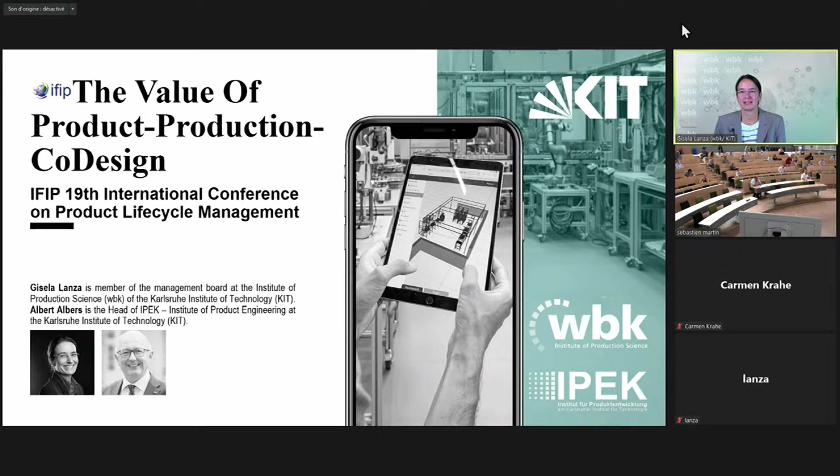And as you heard already, I'm a purely production guy, and I do that research together with our Albert Albers here in Karlsruhe, who is the chair of product development.

So when we talk about engineering, in Europe we have more than 17 million engineers. That sounds quite good, but when we look into the country Germany, and we are really an engineer country, then we have to say we are in a declining area. So we have fewer engineers year by year, especially in mechanical engineering, we have really a dropout. And that's crazy because we need these guys and we need this engineering.

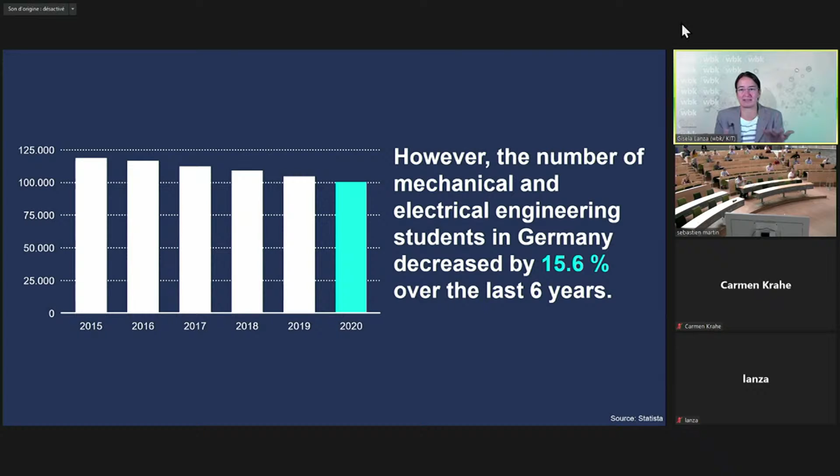And when we look at what engineers do, we have to say only 1 of 6 are working in our field, in our field of, let's say, product and production engineering. Why is that so? I think the world is changing.

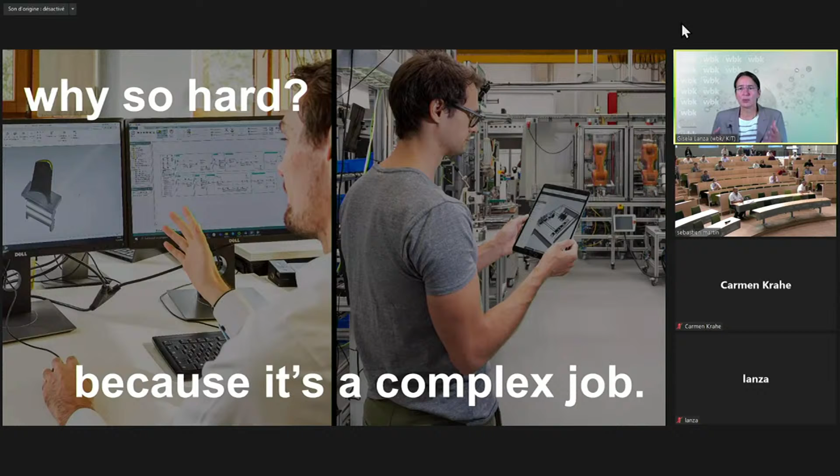Why? It's hard. I think we really have a complex job, and about this complexity you heard a lot in the last 2 days, and I will also speak about this complexity, but I think we have nowadays good tools to handle this complexity. Even 10 years ago already, we had a survey here in Germany, and we thought about what has to be done until 2020. And I mean, if you see that, we are still not finished.

Still, we have to improve the effectiveness of product engineering processes. Still, we have to manage this complexity, and the uncertainty is really high. I think we have good methods and tools, but still they are not standardized. And I think the greatest potential is really that we integrate product development and production planning.

And there I would like to stress this, let's say, not only a new buzzword, but a really important topic where you are all involved, which is product production co-design. What do we understand here? We really think that we need a highly collaborative and parallelized planning, development, and realization of the products and associated production system. We know that already, but we have to think not only about the operation of that, but also the business model, and we have to think about systematic circular use of our products and production systems.

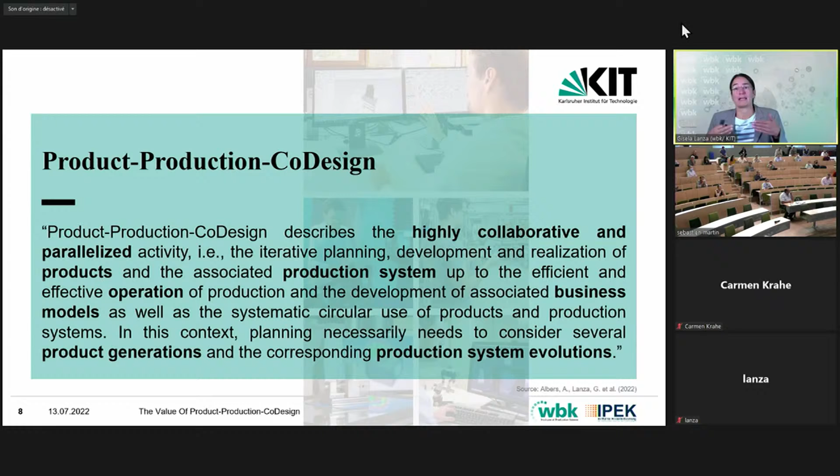And so thinking about not only one life cycle, we have the strong belief that we can model our products and production systems with the idea that products are developed always, or often, in generations. I would like to explain that with the model of Albert Albers. He always explains that a product, or many products, are developed from generation N to generation N+1.

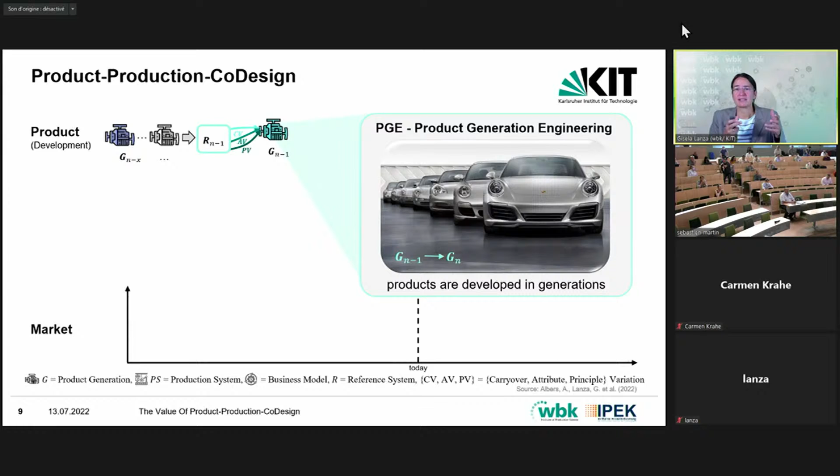So an engine, for example, has parts of the old engine. Even if we talk about nowadays batteries or new technology, it's often a part of an older generation. A good example is our German car industry. You see here Porsches, and they look similar. Even the design is similar, but a lot of the parts have the same function while getting better over generations.

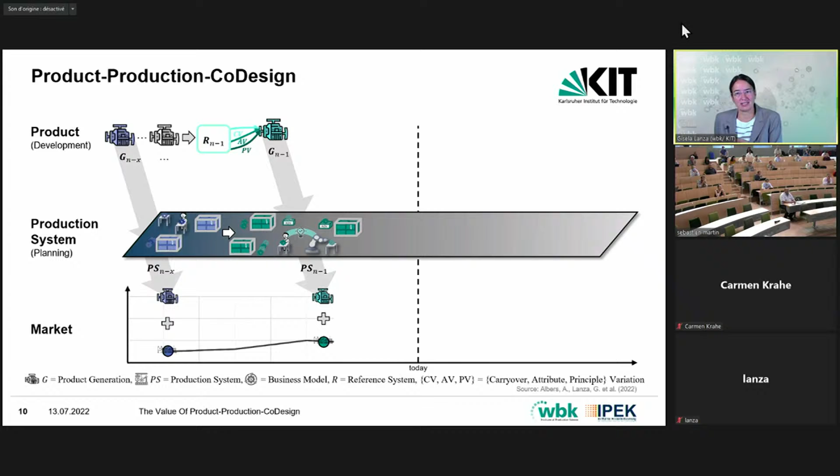And when we look now into the production system, we know we have to plan according to the product features, the associated production system. In many cases, we plan the production system in an evolving way so we don't have to put everything out and do a totally greenfield production plan if a new product is coming. Car industry or OEMs are somehow different, but a lot of suppliers, machine tool industry, they use their existing production system and evolve it, changing it according to the new product requirements.

And therefore, when we talk about a lot of new products, new features, short life cycles, we really need agile production systems, or we call it changeable production system, with all change drivers and change enablers. Like you see here at an example of a typical assembly line, our learning factory, where we can nicely show how to do modularity or mobility, scalable systems.

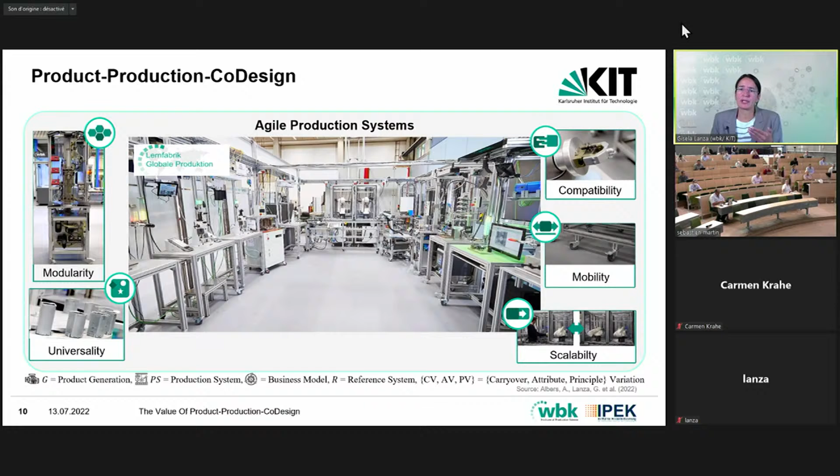So that's needed to really adapt quickly to new products. We have to think about the strong interdependencies between production capabilities and product, and we can model that nicely. But it's getting even more complex because we have to think about further generations, especially when we think about circular economy and circular production, when we want to rework, remanufacture our product, bring components in a second life into a new product. It's important that we handle this complexity and interdependency of today's production system, but also the features of the product of the future.

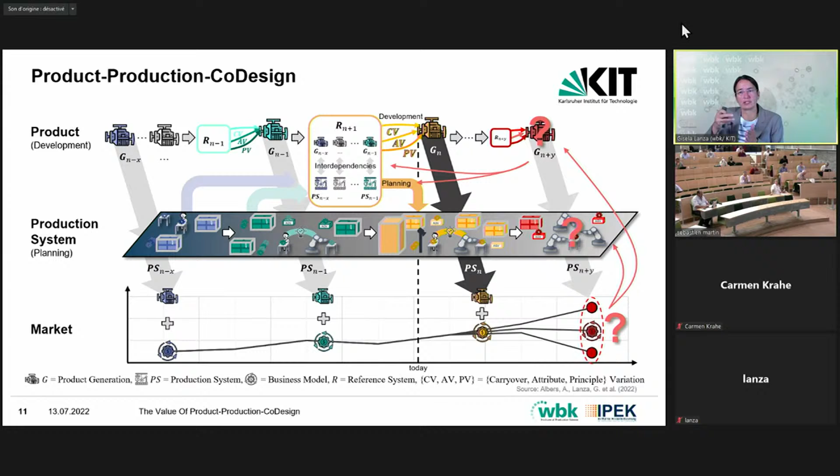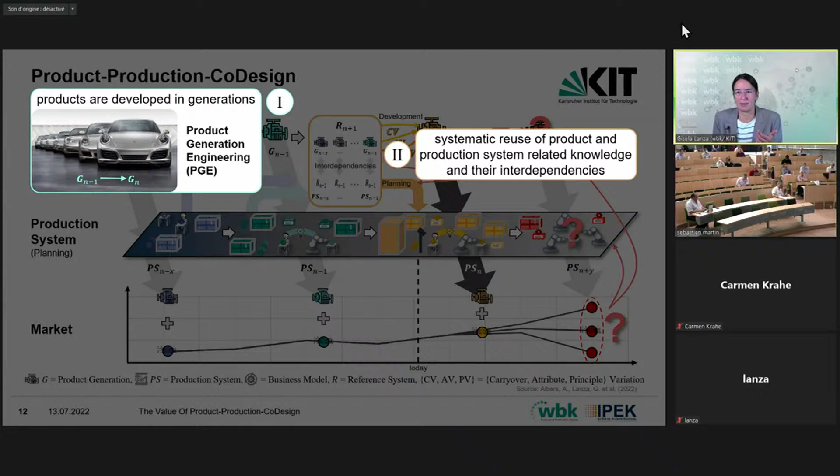And here we think it helps a lot having this model in mind, that we should think: we know a lot about products even in the future, not everything clear, we want innovation, but we can have a reference system in our product development. We can reuse a lot of knowledge from the past, and we do that in companies, but it's more or less not explicit. So it's implicit knowledge, and we have to make it explicit, put that in tools, methods, so we can easily be faster in time to market.

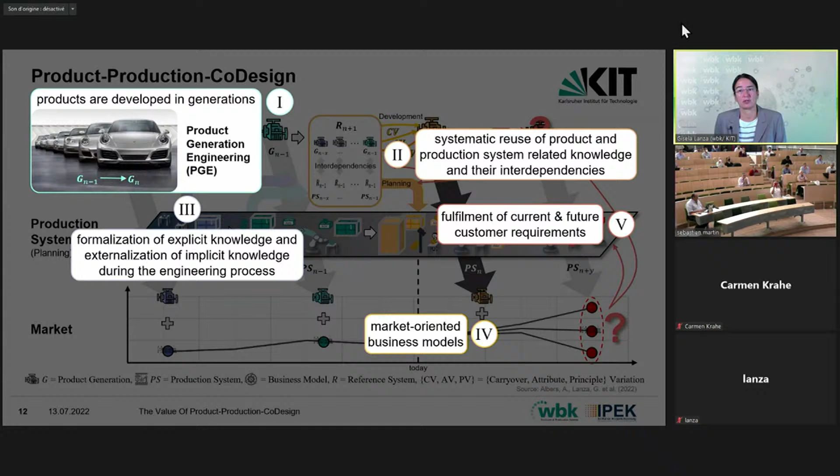And time to market is a good point. We have to be market oriented. I didn't speak a lot about business models, but sure, we have to model and design them in parallel. And therefore, I think we can then fulfill the customer requirements, not only the current ones, but also the future ones. So let's say that's the framework we are talking about.

And I would like to give short insights into what we are doing in that field, and a lot of your work is also done within that field. I think to get to a really strong product-production co-design, we need system engineering as a basic. In Germany we have a big group of people working on so-called advanced system engineering. That's also a good basis for model-based approaches, model-based system engineering. And clearly, digital twin must also be within our toolbox.

So starting with that advanced system engineering, one main issue is that Esperanto. I think we are all of one mind that the single systems in engineering, for example mechanics or electronics, are so complex. We try to have one common model and that doesn't work. But we need to have a level above that real detail complexity where people can talk to each other. That's called the Esperanto of technology, or you can call it like that. That could be advanced system engineering.

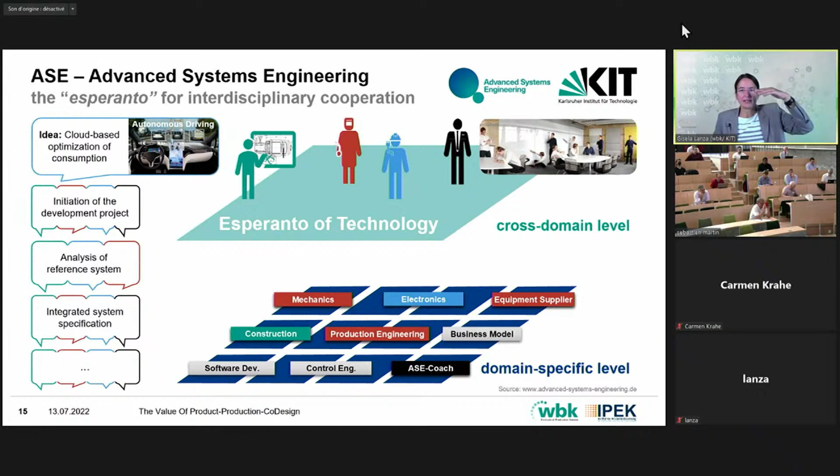For example, an electronics engineer is deeply in his E-plan modeling and designing, but then he has to share his information with others, like mechanics or construction people. So they are going up and down in development, able to talk to each other, not only personally, but in a language, in a model world, and then also be able to go back to their detailed work.

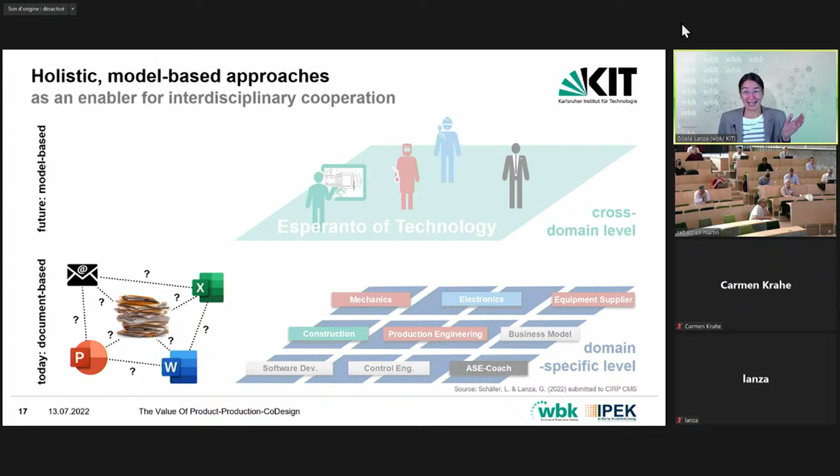And for that, I think this model-based system engineering could really be the game changer. Because at the moment everybody has his own models, his own documents, and we try to share a lot still with Excel tools. But when we come to model-based systems which understand each other, which share a common interface, that could help a lot.

Here I would like to give insight into a project, a national project called MoSyS, where we really try to do that on 3 levels: product development with product features and connection, processes, the translation between product and production - production processes - and then the assets, the resources, and that's the 3rd level, the production system.

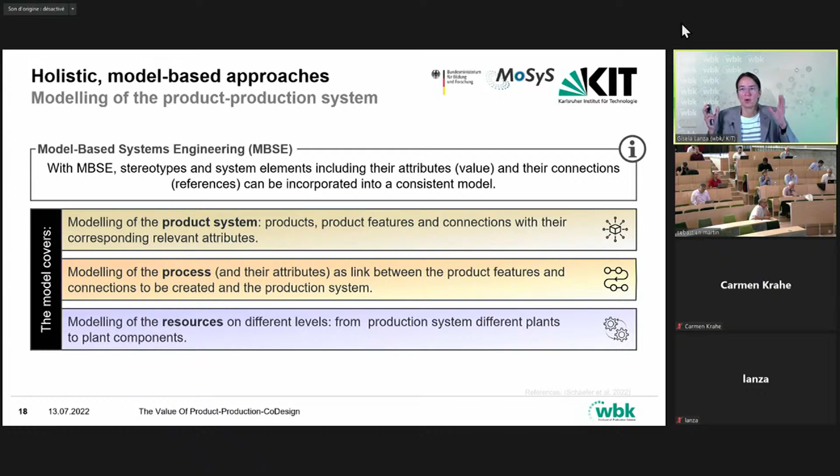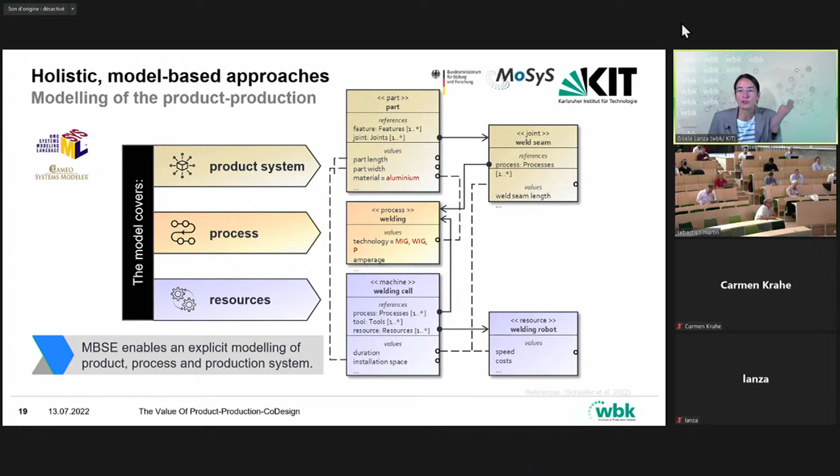So the vision is: coming up with a new product design and automatically your production system is planned. Let's say starting with a new customer variant - that's from the automotive industry, a welded part.

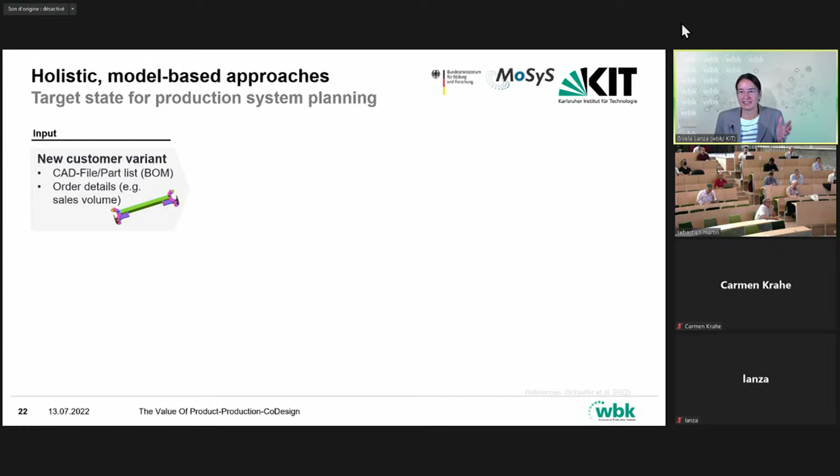You know how much of the part, or you think you know the volume, and you know the CAD file - maybe it's not finished - but then you can analyze the product, find out the similarities to past data, and that's what I mean with explicit knowledge.

You have a lot of knowledge, and you can derive process sequences, assign that to resources, and come up with a virtual production system. So that's the task - only based on product data - to come up with that workflow, and this workflow we've dreamed of for many years.

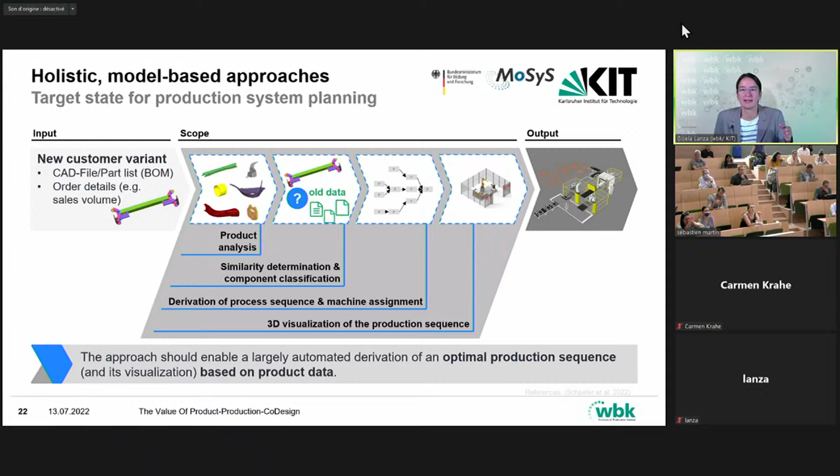What can we do for that? I think our tools nowadays are stronger than in the past because we can handle a lot of data. And that's what I want to show with the one-time expenses. Let's say you have to set up reference models with model-based system engineering, and having that, you can then easily apply it in a specific project in reality.

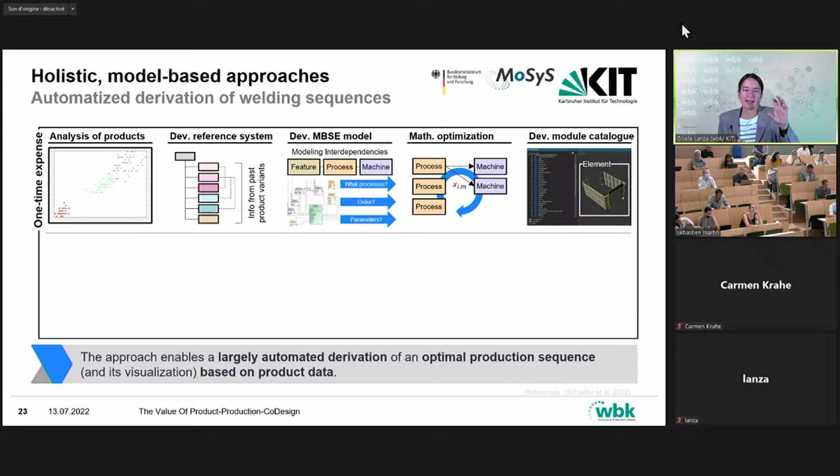For example, analysis of products - you see here some points, I will show similar examples later - where you learn about your product features, also with machine learning, and say, okay, 80% of this product I know already, I have done it in the past.

So I can classify all information about that and set up a reference system where I can classify a new product coming in. And not only for the product, but also for my processes and my resources, and then I can do mathematical optimization and come up with virtual systems, as I said before. So the tool chain in a real project, if a customer order is coming in, could look like that.

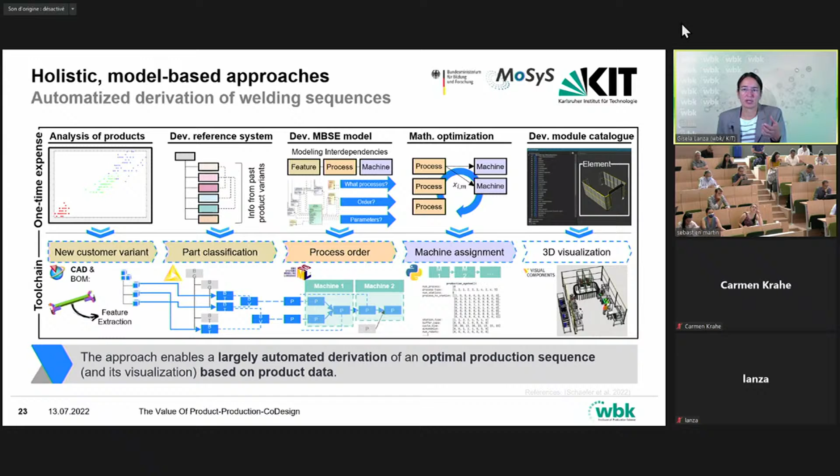You have this new customer variant, then it's classified according to the reference system. You derive a process chain, assign these machines, and come up with that visualization. And that works already - not for everybody, still a lot to do - in these model-based system models, in the reference models, but I think it's really worth setting up.

In another project, we came at it differently. Here the product function is fixed, but still as production planner, we try to optimize the process chain. Can we even persuade the product designer to change a little bit their deviation, their shape, to have better processes, better production, and therefore cheaper costs? You know, we production guys always have to optimize cost in production.

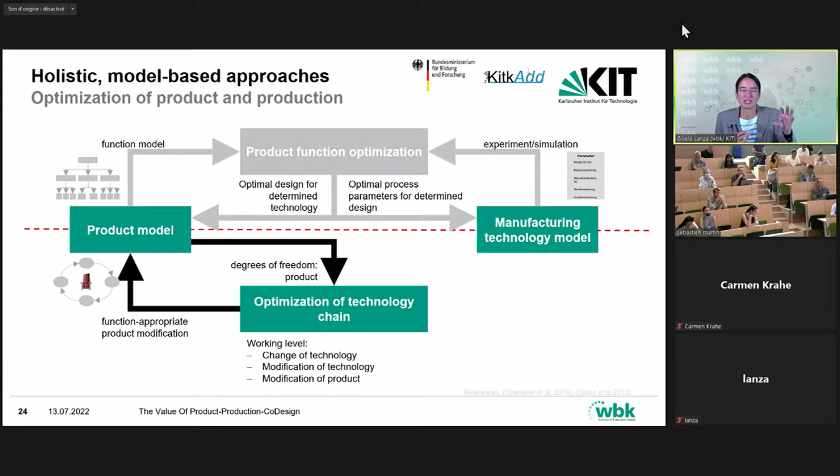So we start with a fixed product model and fixed manufacturing technology model, the chain, and try to find out what is the degree of freedom in changing the product. But this product has to have the same function as before, because the design phase is already closed. But maybe we can change a radius according to better technology. Could we change the technology and have something better, faster, cheaper, and so on?

So can we change technology, modify the technology, and even look in the future and say, okay, we did a lot with generative additive technology. We know at the moment the capability of this new technology, but we also know that in a few years we have a huge learning phase, a learning curve, so we know in 3-5 years we have higher capability than today.

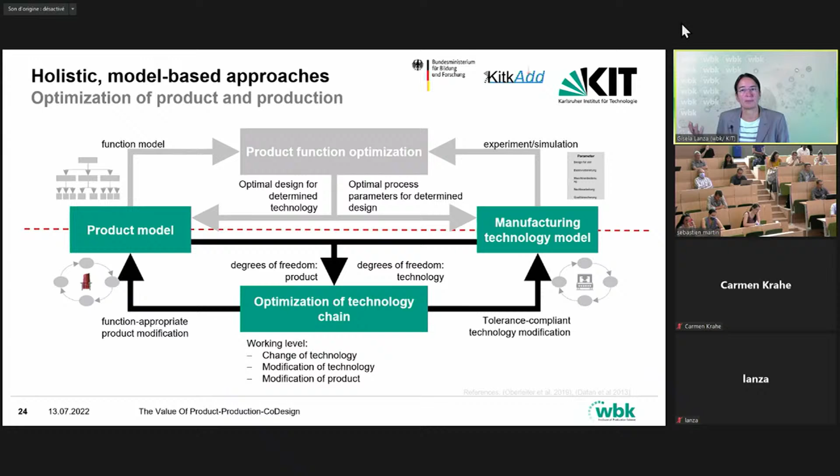I would like to give an example here: a turbine blade from Siemens within that KitkAdd project. At the moment, this shaft, the top of the shaft, is done by SLM, selective laser melting, because of cooling issues in the shaft, but the foot is still cast. In the current phase, in many cases it's totally cast, but yes, the first ones are also done partly by additive manufacturing already.

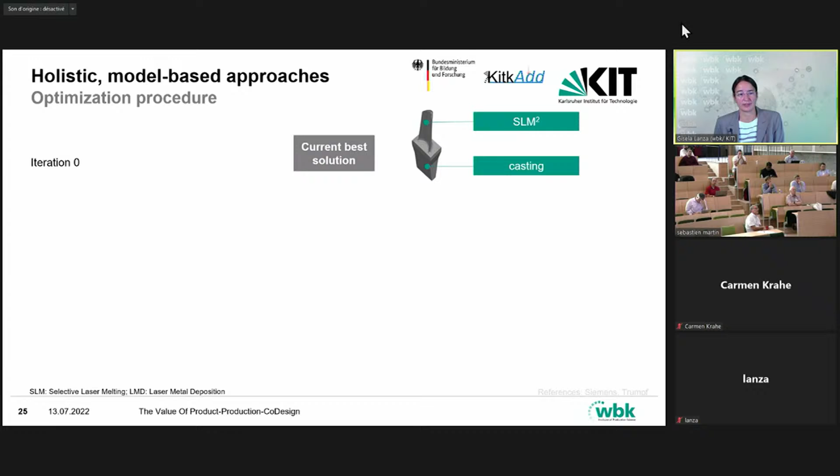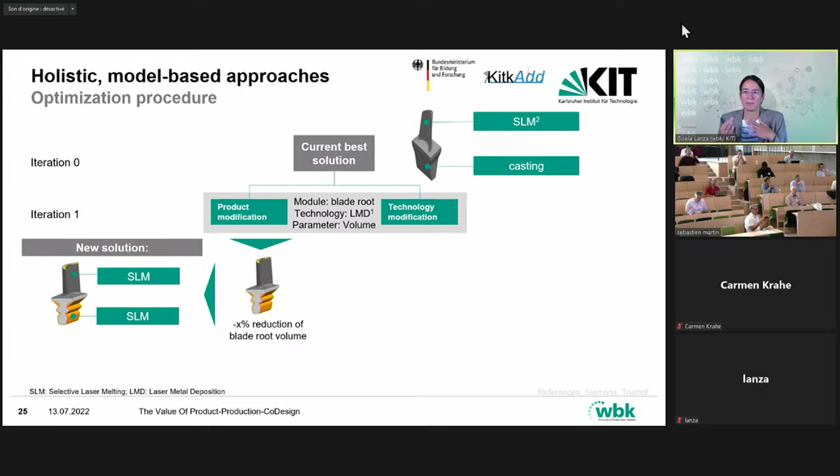Then we try to do optimization, try to find out, can we change, can we have some modification in the product? Could we think about new technology? For example, could we do everything, even the foot, with SLM? Could we then reduce the volume, and how much should we reduce the volume so we come up with the same characteristics of the product? Because the material characteristic is different here. Is that possible? Is it not possible?

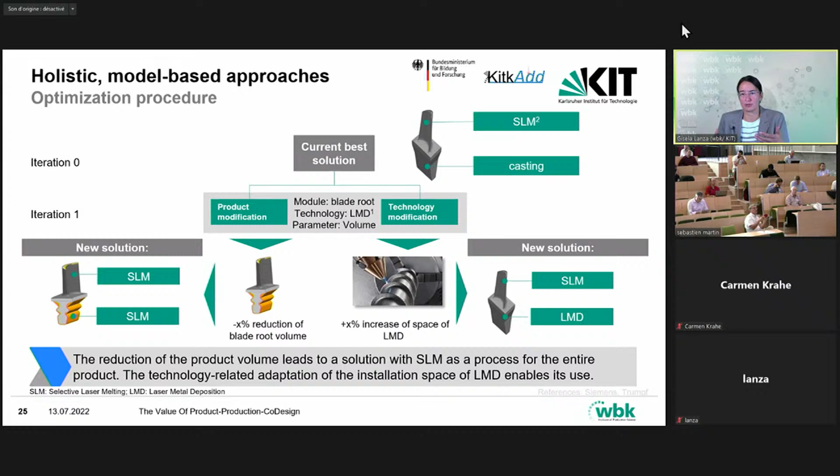On the other hand, we have new technology like laser metal deposition, which works with bigger volume, so we can come up with a faster process. So we could do the foot with LMD.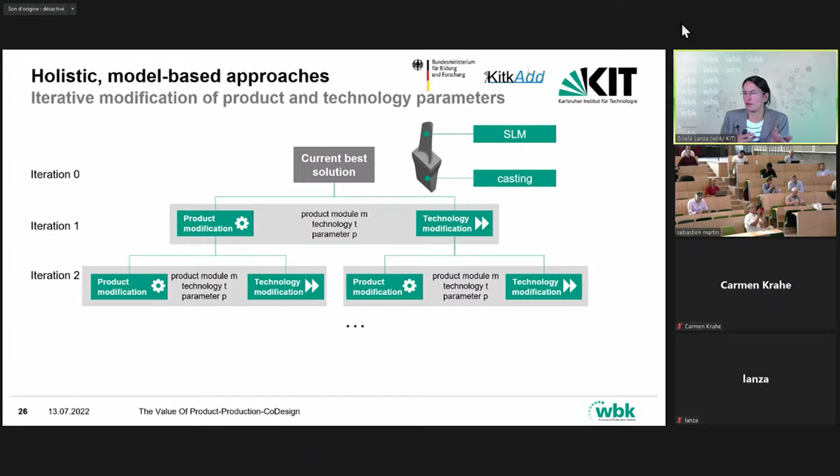So we do that iteration and come up with modifications in terms of cost, in terms of material characteristics, but then in the end, clearly the designer and the responsible product manager have to decide if that is possible, because it's only one part of a bigger product. So we do that iteration, coming up with an optimized solution.

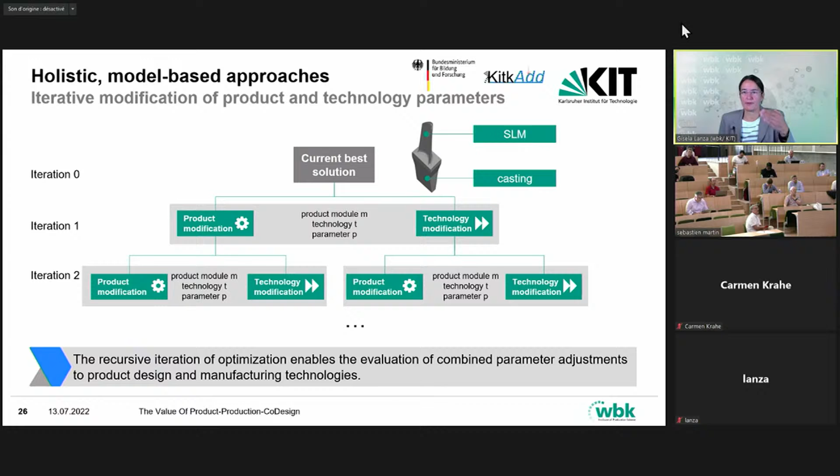For example, here the solution could be a conventional part. We can compare that with the starting part we saw, this hybrid where we have additive at the top and casting at the foot, or compare it totally with additive. This gives us a good assessment of different technology, changing things a little bit, finding out what is our field of freedom to change here in the technology and in the product, without having a totally new product design.

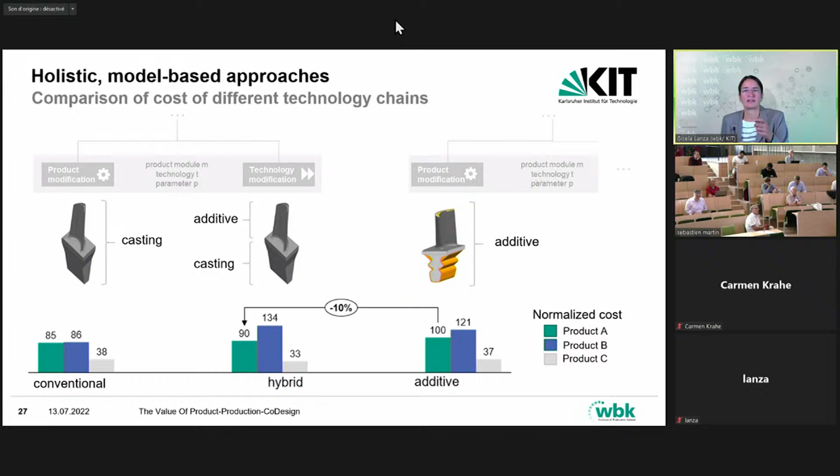That's clearly a topic where we as production guys would like to change something, but we can only do it in a really strong collaboration. We have to test it, simulate it, verify that it really works for the product guys. And if we can do something like that, we can come up with a digital twin.

I really think that's a main topic we all work on, because a digital twin is much more than only a virtual representative. So we start with the understanding of that definition. There are a lot of definitions, but we think, okay, at the basic we have a digital master, and this digital master, ideally, is done with model-based system engineering, as I showed before.

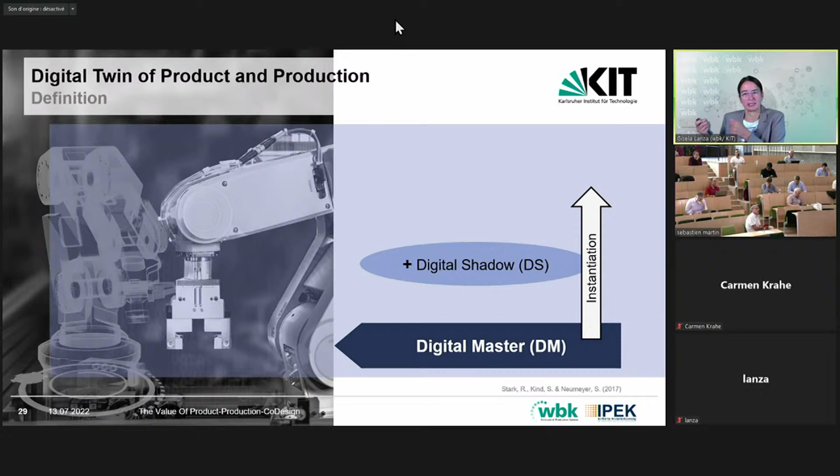And if I combine that, or interconnect that, with the real data in the real world, in real time, with very high iterations, then I have digital shadows. Together, digital master with digital shadows, when I connect them and even use algorithms, simulations, correlation, then I talk about the digital twin.

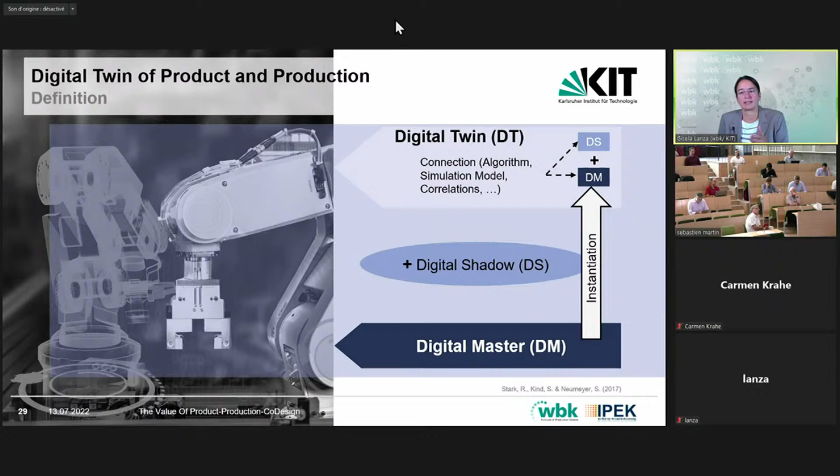I would like to give examples here too. As I said before, the digital master can help a lot in the planning phase. Sometimes people also say the digital master is the digital model, and as we said, we spoke about the model. But what can we do? We can nowadays handle our data a lot better and be much faster in terms of optimizing and routine work.

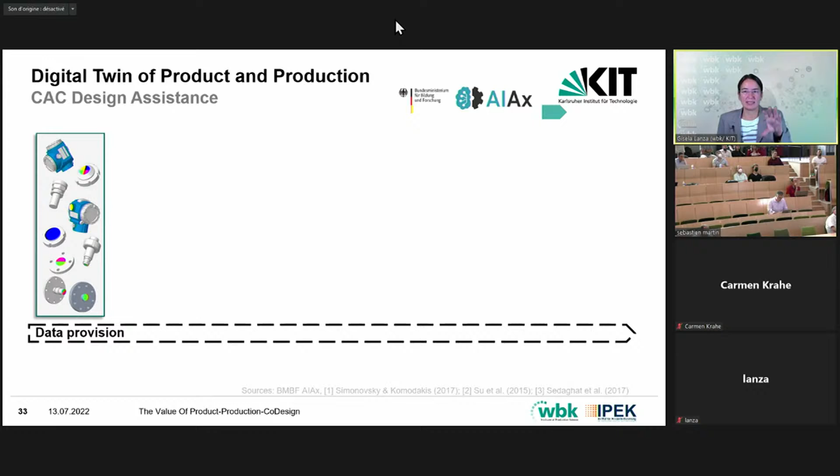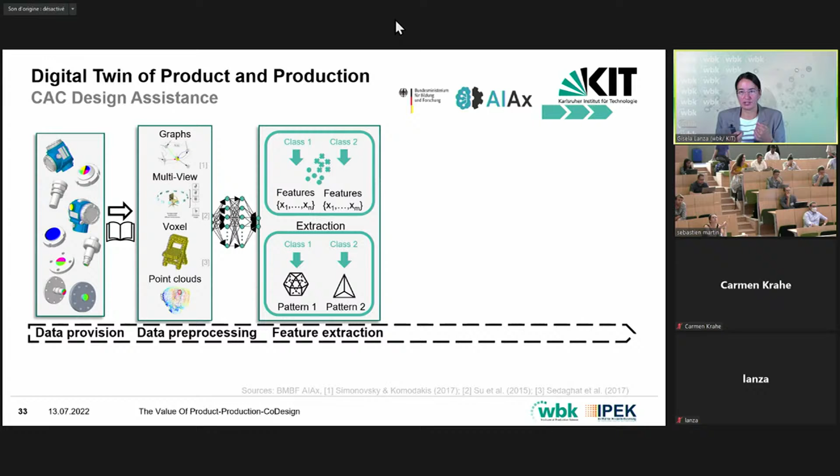In a huge project in Germany, called AIAx, we try to have a design assistant for the CAD designer. In this company, there are a lot of similar products, like these sensor components. We try to process them to come up with a digital representative, find out what the features of that product are, and then try to classify them and help the designer come up with a similar solution.

Because that is a simple part in a complex product, we love to come up with new solutions, but in that case, if I talk about this housing and flanges, it would be better to think about what do I already have in my CAD, in my product spectrum, and can I use a similar product? Maybe I have to change one or two features.

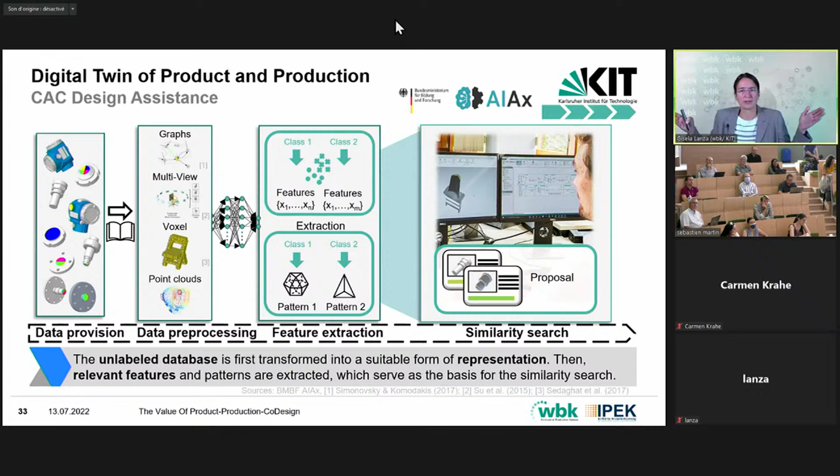This product generation development is very important, but in this case it's not a generation, it's more a variance, a broad variance, a lot of variance. They have thousands of these flanges and housings. So how do we do that?

We try to have really unlabeled CAD data, and that's important. We have to use machine learning algorithms, and at the moment we have to put a lot of human work into that project. But I think it works, because then it's getting better and better, and in the end the system will learn automatically. So we try to use CAD models, represent them as point clouds, then use this kind of machine learning algorithm encoder.

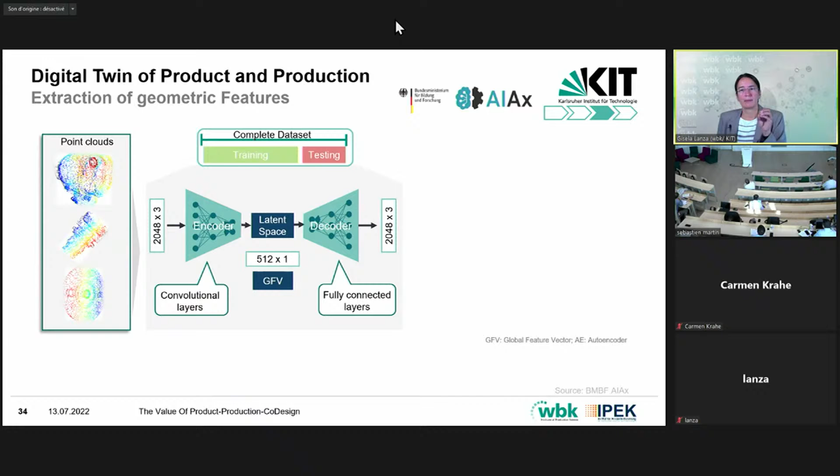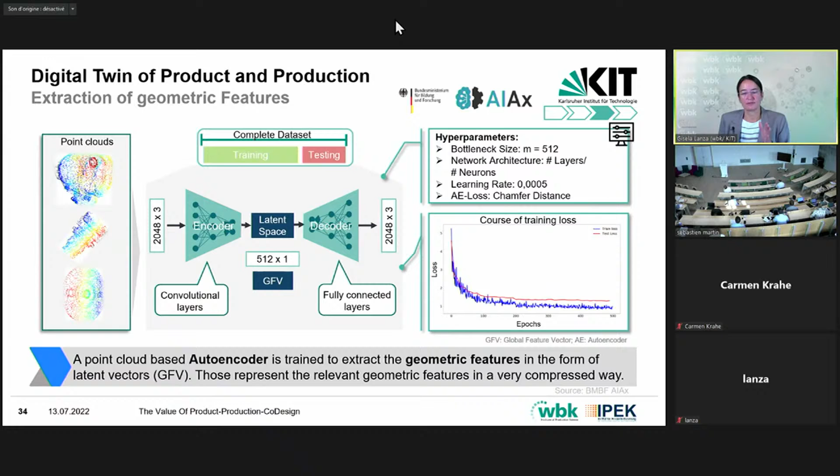We try to represent this CAD model as one vector, this one latent vector. Why? Because then I can easily calculate it, and if this vector is similar from one product to another—for example here in this graph shown—if the distance is not far away, I know these products are similar. And I didn't have to describe the product before with metadata like volume and material. I only have the CAD model, and that is done automatically.

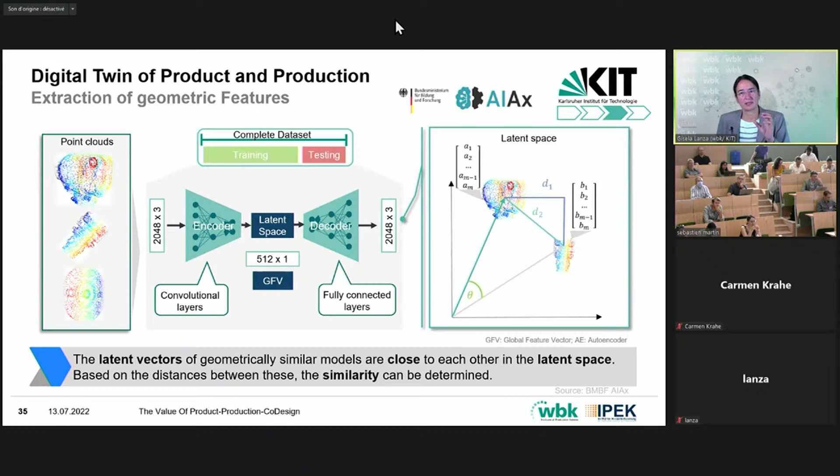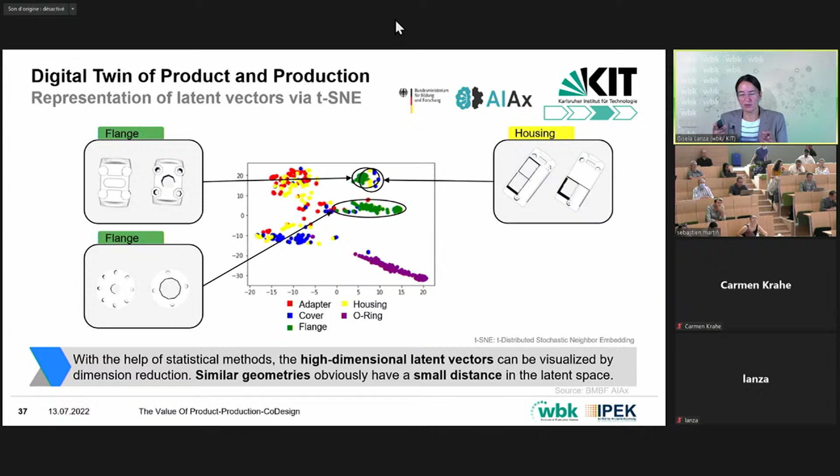But the algorithm works. If we look here at that flange, this green one, and this housing on the right side, they look really similar, and you see that the algorithm found that out. So in that sense, the algorithm couldn't find the reality, because on the right side it's a housing, on the left side it's a flange, but it works in terms of similarity, and that helps a lot.

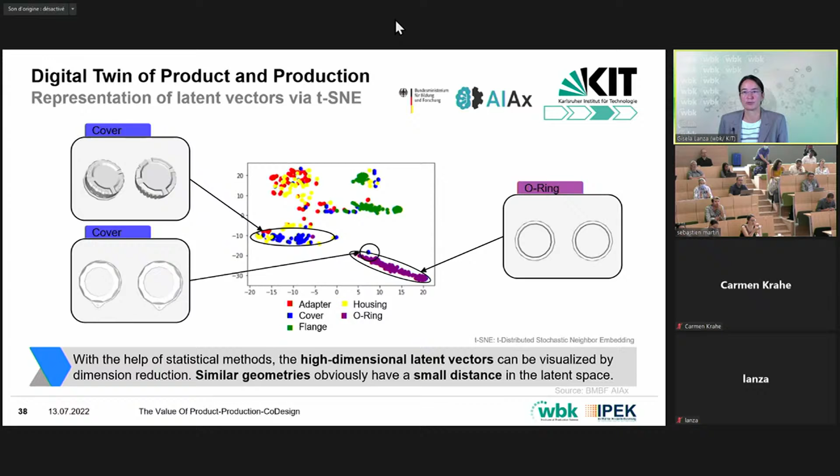For example, in other cases, covers and O-rings look similar. So what can we do with that? The designer can come up with a model, and then the system can clearly show him what already exists in the CAD system, what other colleagues have already engineered or designed, and we can do it automatically with these latent vectors.

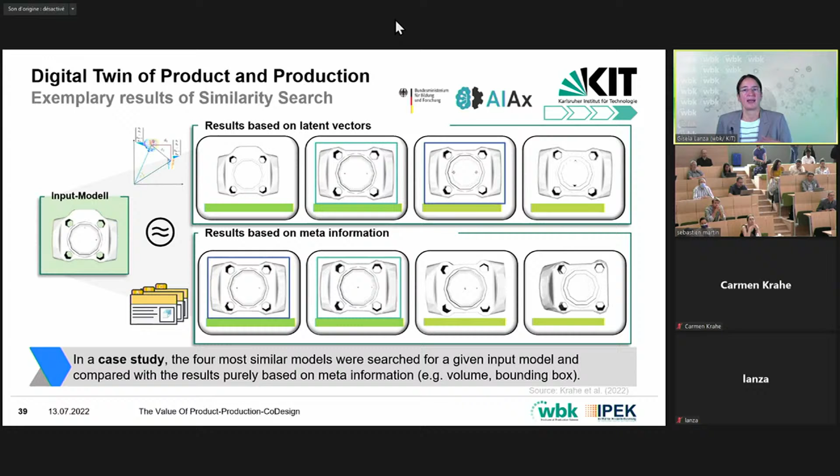And if you compare that with commercial solutions which use metadata for similarity checks, it's the same. But as I mentioned, it's machine learning—it works even better if we have more and more data, and that's what we have to set up at the moment, I think.

So what we have done already, in this kind of research project, is set up a prototypical implementation in a commercial system like Creo. The next part is that when the engineer starts designing something and has the first shape, like a wizard, the system then tells him what to do next, or what the final solution is. So it's not only a similarity check at the moment, but it's also proposing the final solution of what he wants to design.

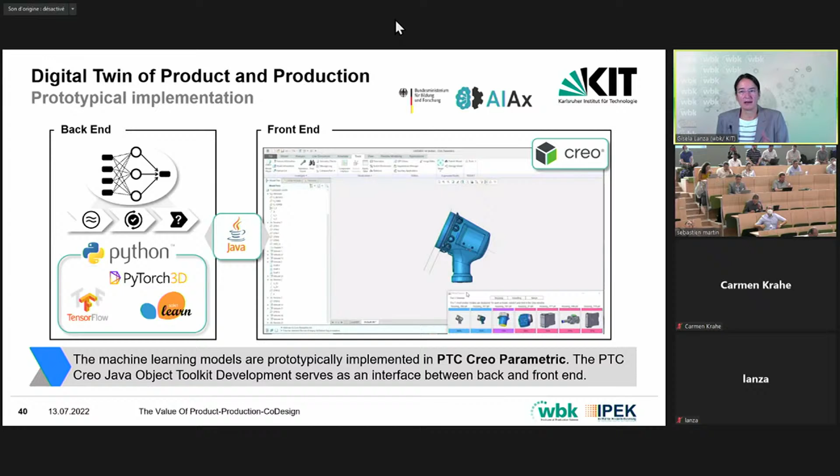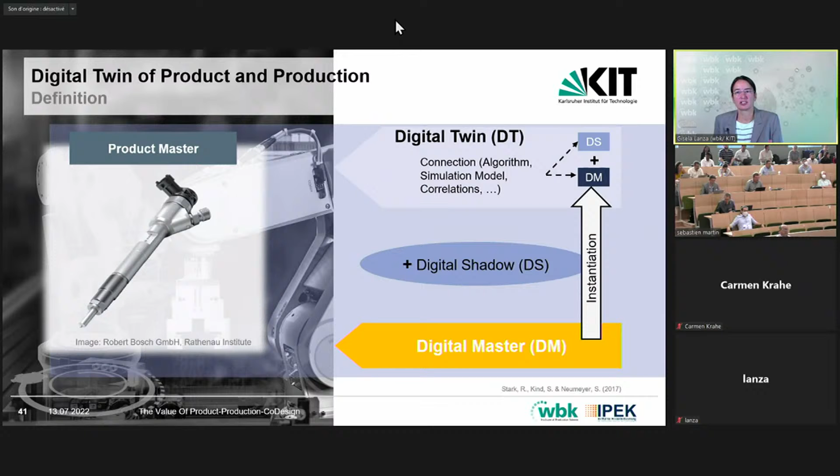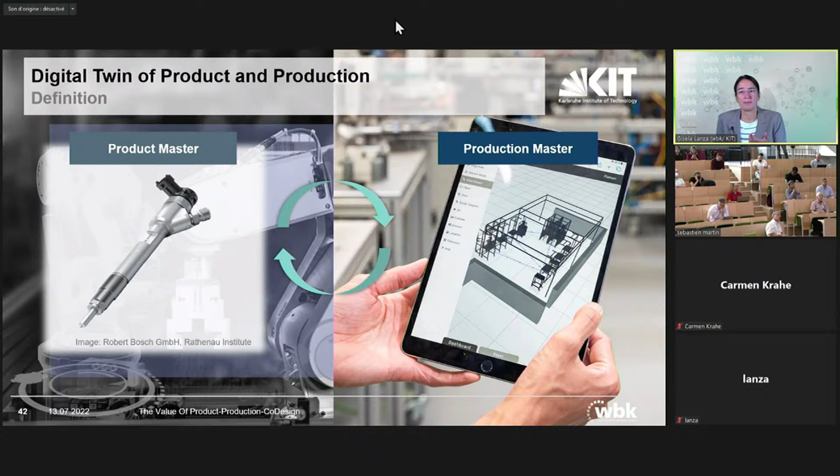So I think here we will see a lot of advantage and progress in the next year. Combining such digital models, digital masters, with digital shadows, as I said, with reality, then we can come up with a digital twin. And here I would like to stress that I'm a production guy, so I would like to combine product with the production system and come up with a very good solution.

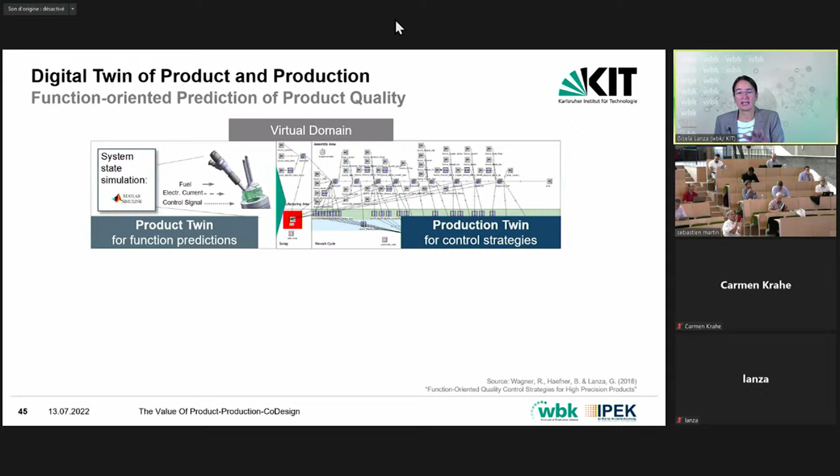Therefore we not only have the product master, we also have to have the production master, as we have seen in the example before. So in the virtual domain we blend that, and then in the digital shadow we combine that with the physical domain. In the physical domain, we have to connect these sensors, this data. For example, end-of-line testing, we can then connect the quality function according to our model, or the inline sensors. Having this real-time connection, we can come up with a digital twin.

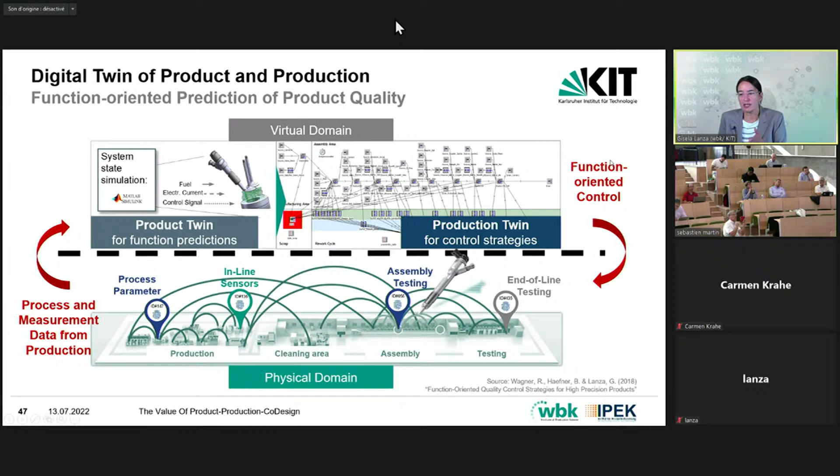In this example, we try really to optimize the process and measure the measurement data from production, and have a much better function-oriented quality control at the end-of-line testing.

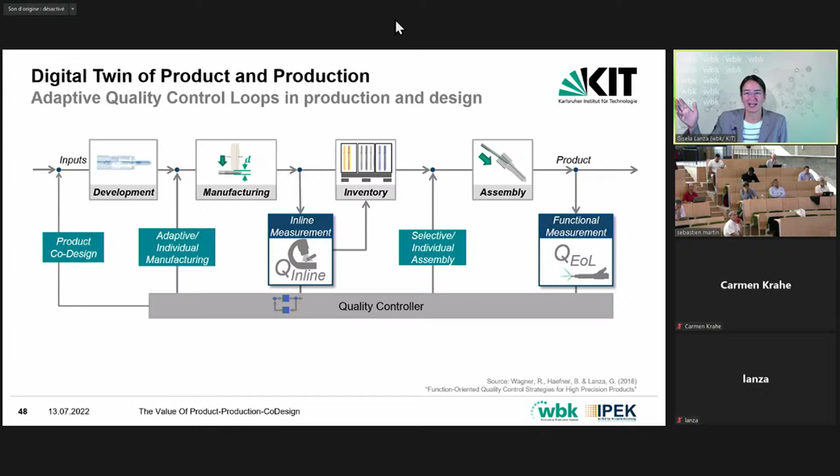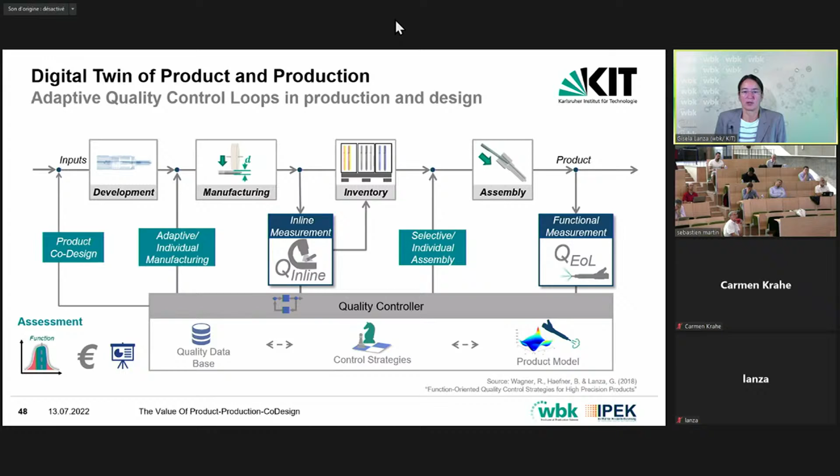So one idea is that with that digital twin we really have to come up with adaptive quality control, choosing selective assembly, adaptive manufacturing. But what I would like to stress here is that I can even adapt my tolerances in the co-design, because I know what kind of function I want, and therefore I can really close the loop and come up with a production-oriented, function-based design already in the product design. I really think we have great potential with that kind of data, with the data analytics and the methods and tools we have now. And as I mentioned, model-based system engineering is a great issue. Thank you very much for listening to me, and I would be very happy now to answer your questions.

Thank you very much, Professor Lanza, for this very inspiring presentation, bringing your vision of the production of the future. I think we now have lots of inputs for the discussion. Who wants to start?

Well, thank you very much, Professor Lanza, for your very interesting speech. You started by telling us that we are trying to manage complexity, and I fully agree with this statement. But we propose systems in order to solve complexity, which become complex, more and more complex every day. What do you think about that, and what could be the good balance between both?